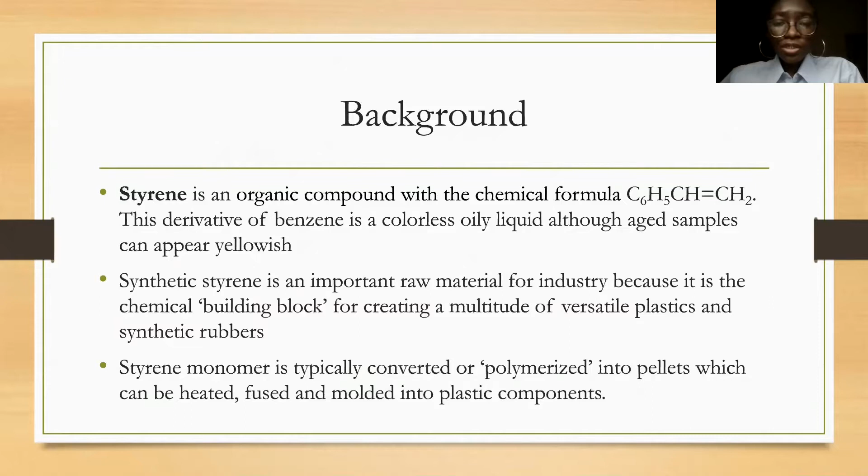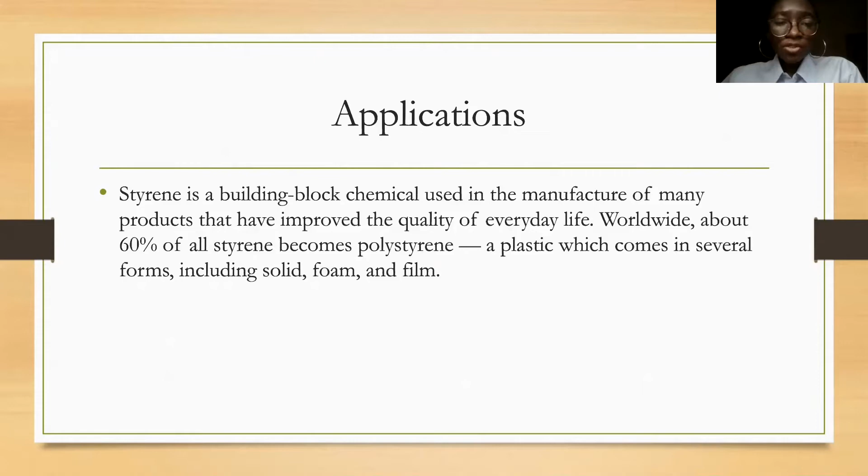So this is a little background. It's an organic compound and it's considered a very important raw material for the industry because it's used in manufacturing other materials that are marketable. Most of this styrene produced is manufactured into polystyrene, and others are ABS, SAN, SBR, SBL, which are all styrene-based materials. Next is our market survey.

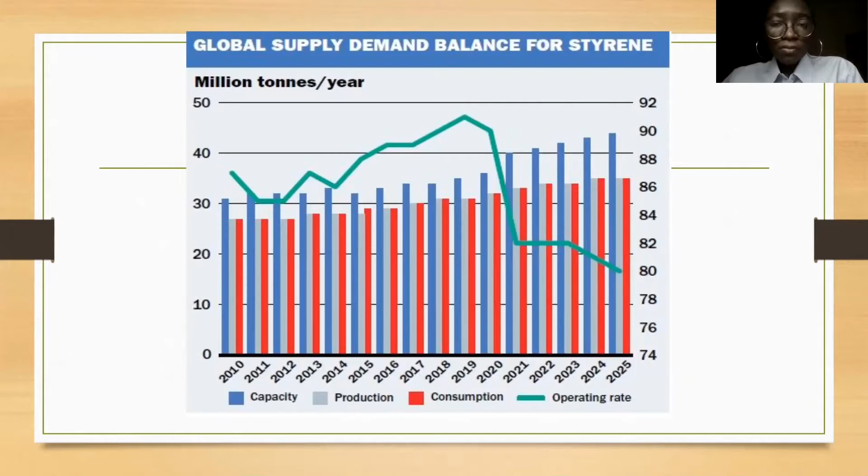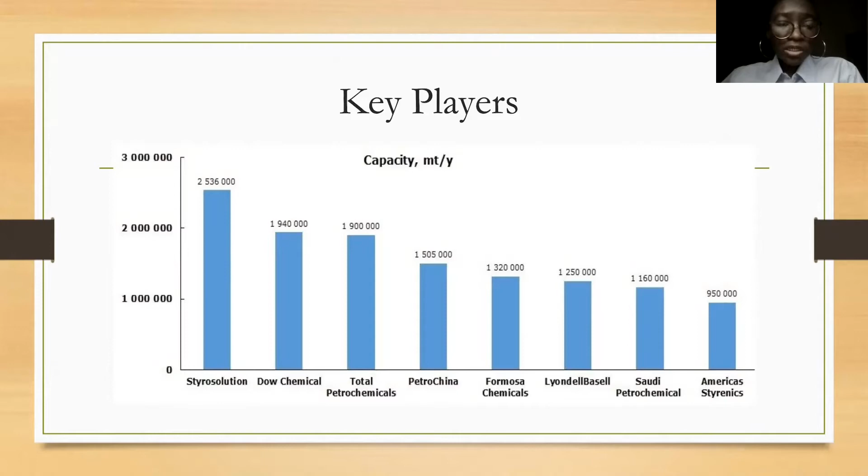So these are the key players with the chemical companies and their capacity per year, with the highest being Styrolution with a chemical capacity of about 2.5 million tons per year.

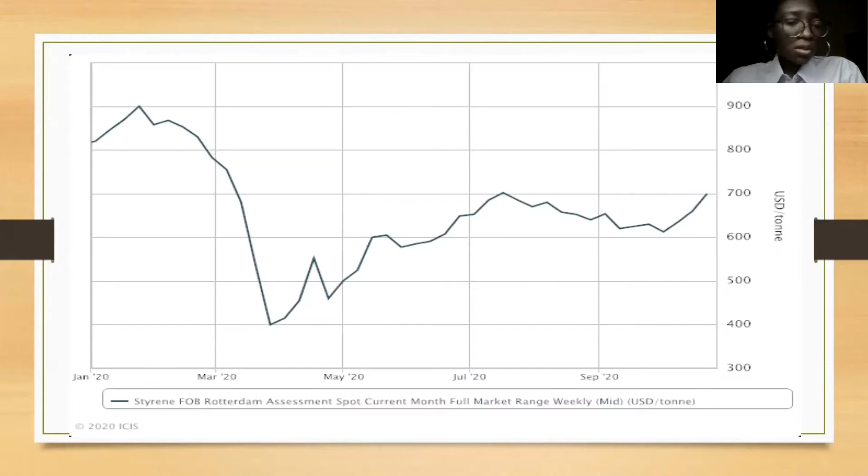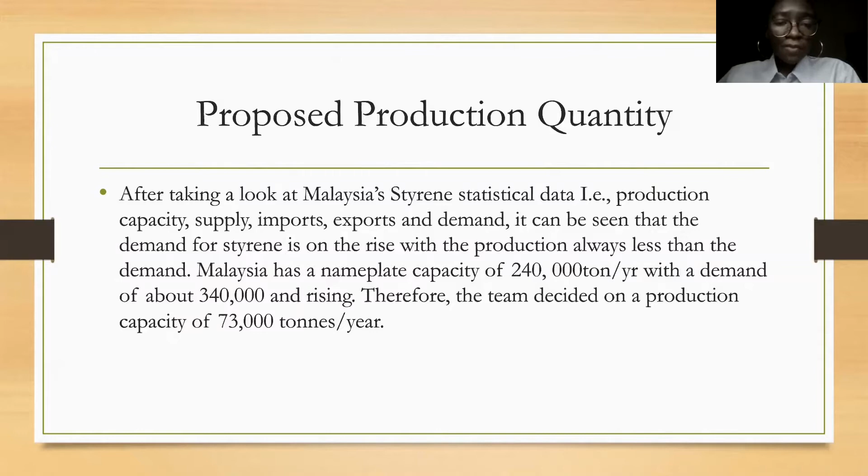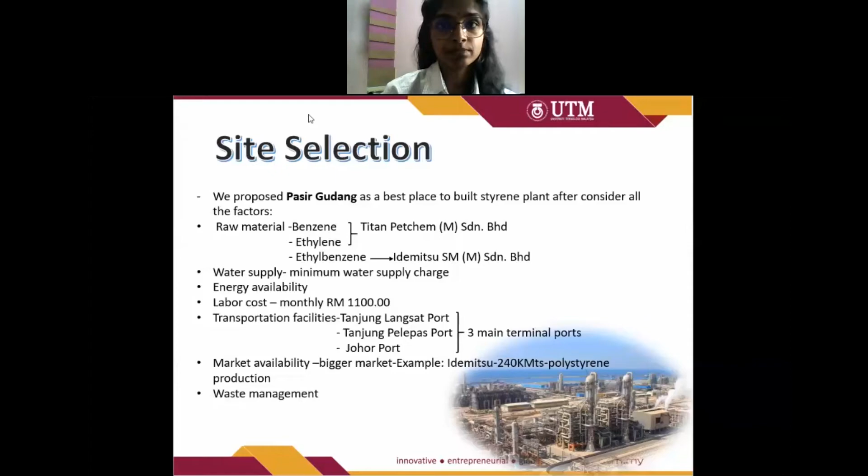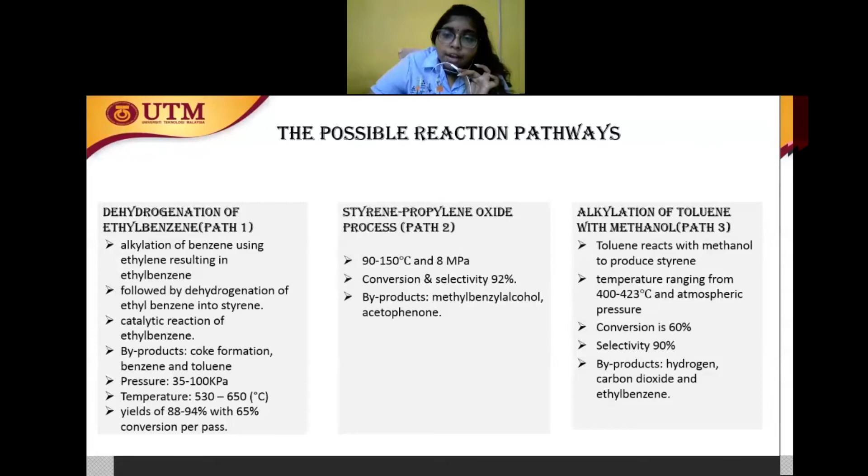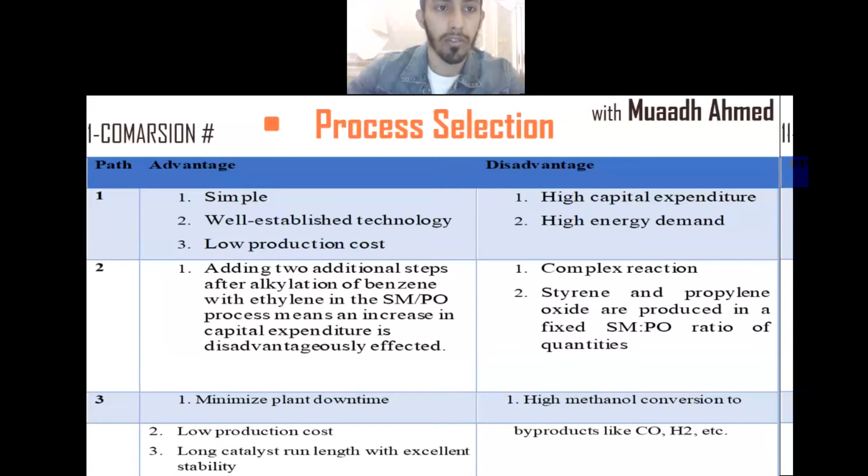So hello again, this is Muaadh Ahmed Saleh with process selection. After discussing the process synthesis with my friend, now we are going to discuss how to choose the best reaction among them. Some information was obtained from articles and we made tables of advantages and disadvantages of each reaction. Then we calculated the prices of each chemical included in the reactions to do the economic potential calculation.

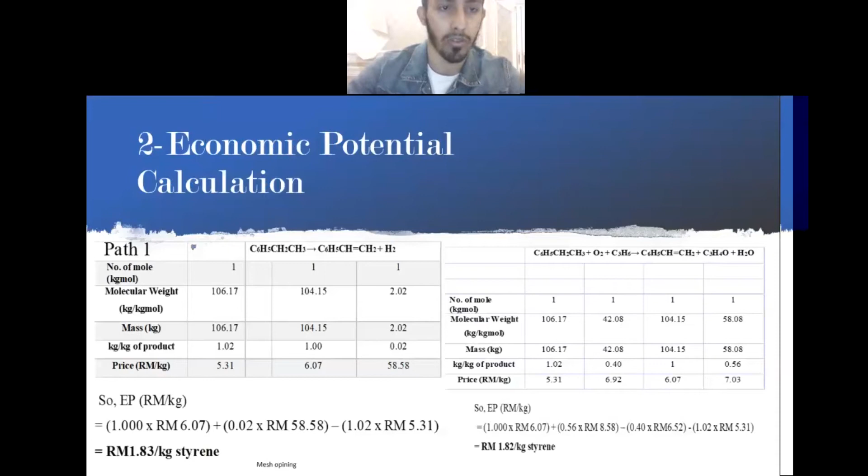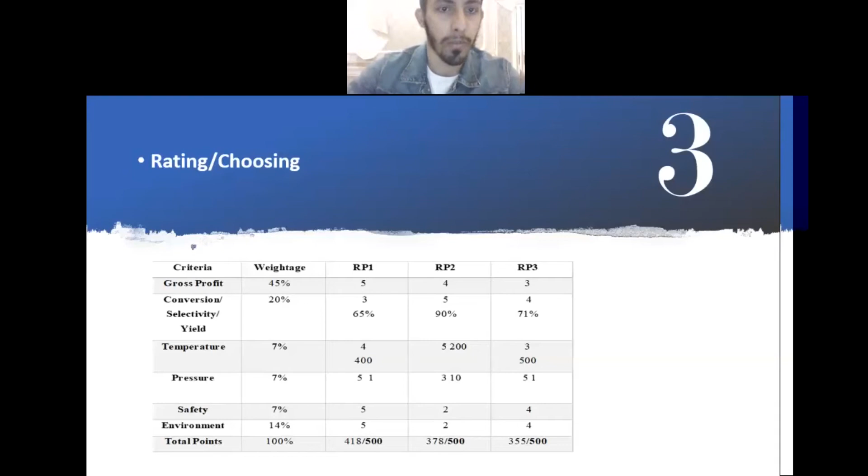In this step, we found that the first reaction is the best reaction in terms of gross profit. So we did a rating using weightage. We chose that, and we obtained that the first reaction is the most suitable for our production. This is the justification based on the economic potential and the conversion rate.

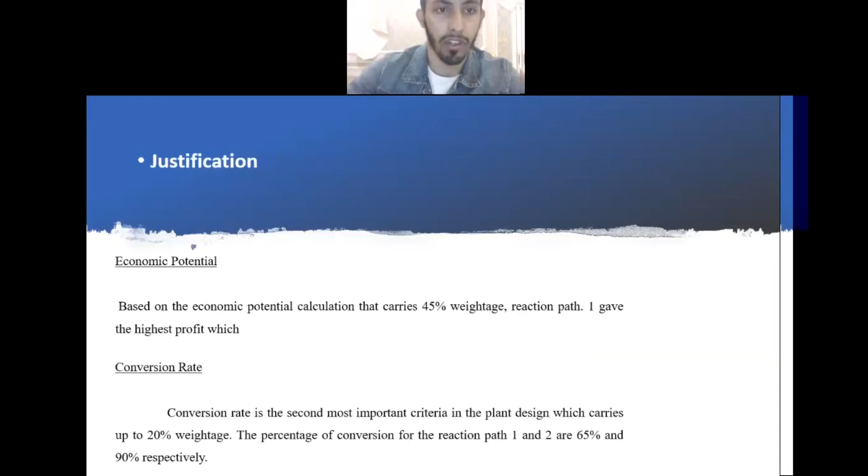So for task 2, the first one is the process creation synthesis. Because of time constraints, I will just explain basically what we considered as we did it; all the calculations are in the report. So the first step is to eliminate differences in molecular types. This is basically us evaluating and ranking all the reaction paths.

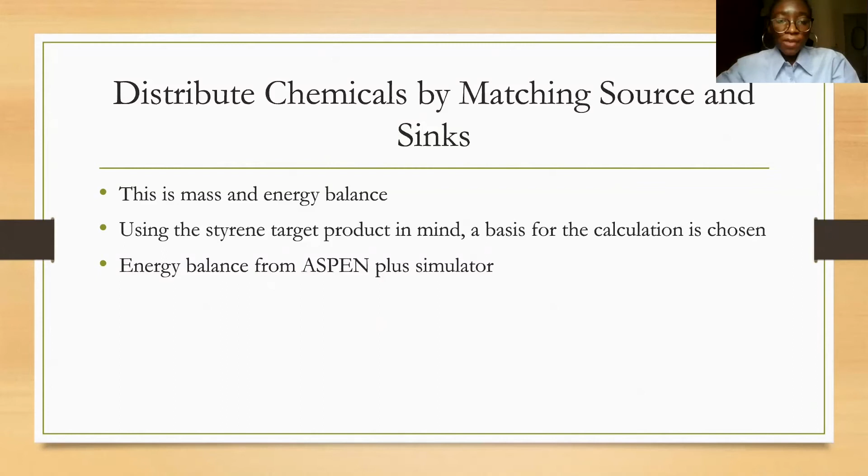After this, we got this chemical reaction, which is what we decided to go with. The next step is to do the mass and energy balance, using the styrene target as the basis for our calculation. The energy balance can be obtained from the simulator.

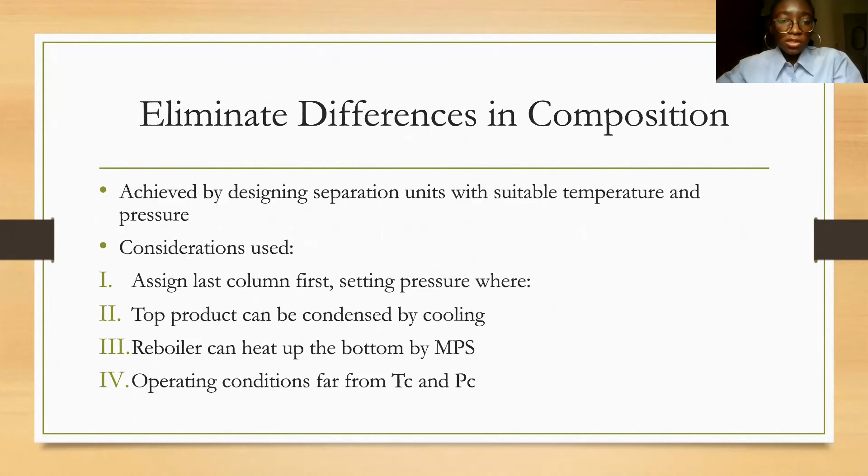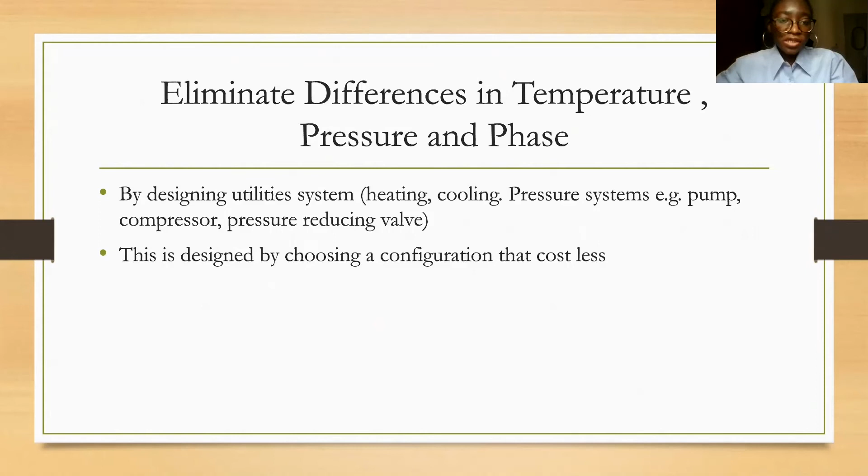Next is to eliminate differences in composition, which is achieved by designing separation units, and these are the considerations we used. The next step is to eliminate differences in temperature, pressure, and phase, which can be done by designing the utility system. Finally, you integrate tasks by allocating appropriate unit operations, then integrate several processes together using a single unit, and finally favor the process that reduces costs.

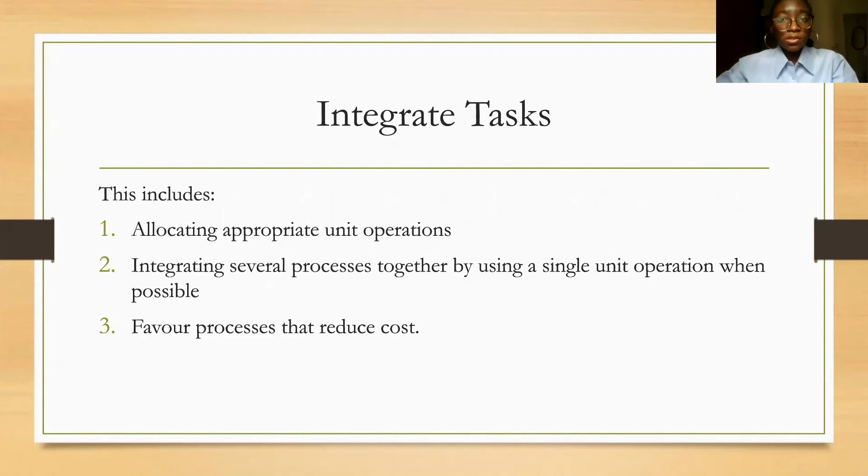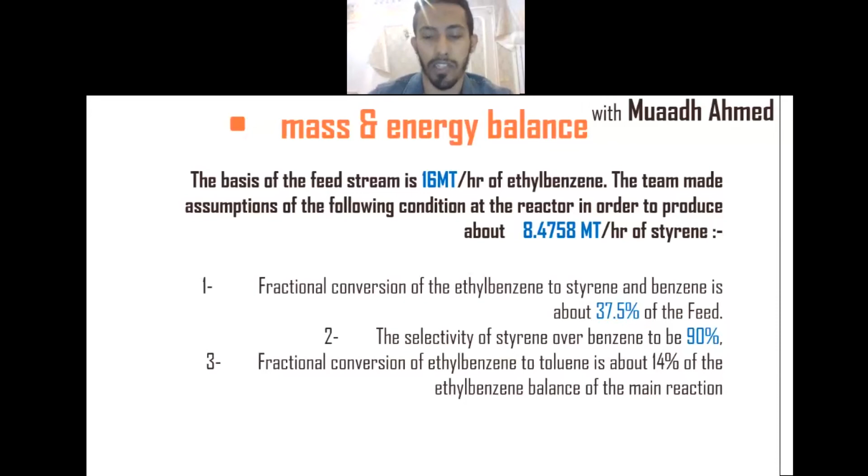Hello again, this is Muaadh Ahmed. Mass and energy balance is discussed. So to calculate the mass balance, we have to know some information about the fractional conversion and the selectivity of the reaction. This is the reaction that we chose in task 1, which is the best reaction.

After using the selectivity and the fractional conversion of the side reaction and the main reaction, we calculate the mole fraction of the output stream. Then we convert the mole fraction using the molecular weight to get the mass fraction. Then the output stream is calculated.

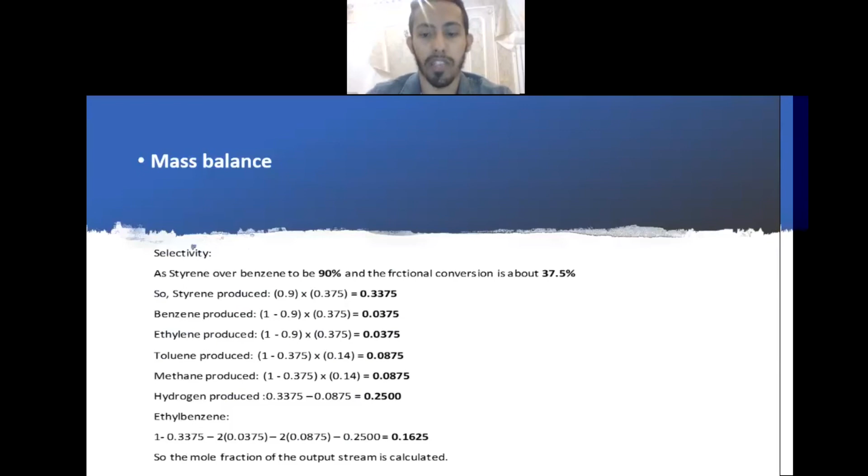The bottom product from the three-phase separator will be fed into the first distillation column, where the organic liquid is separated from the ethylbenzene and styrene. The organic liquid will enter the second distillation column to undergo separation of toluene and benzene, while the bottom product of the first distillation column will undergo liquid-liquid extraction, where the ethylbenzene is separated from the styrene. The separated ethylbenzene will be cooled and recycled back into the stream, while the styrene is produced at a rate of 8.48 metric tons per hour.